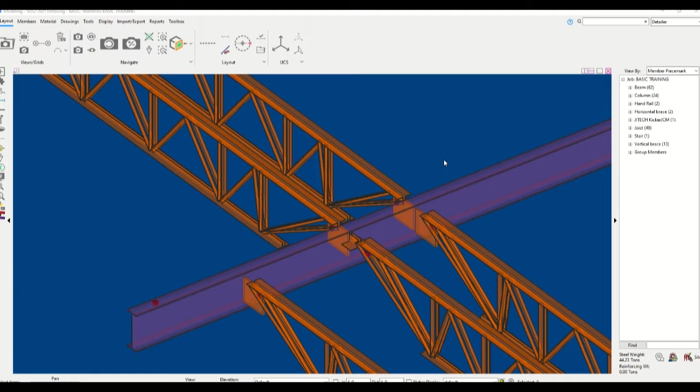So in order to use this, there are a couple of things that we need to know. First, one of them is going to be the field that we call ref X on the end of our desired joist. So in this case, ref X is 1, right?

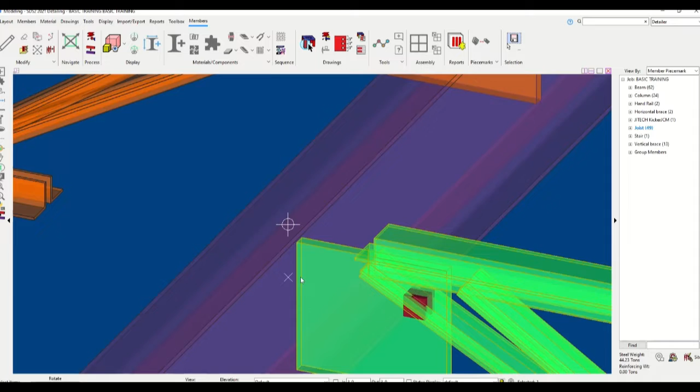And then the other thing you're going to want to know is the height at which you want to place the clip angle, not from the web of the beam or the top of the steel, but from the edge of the plate. Okay? In this case, we're just going to make it 1 inch as well.

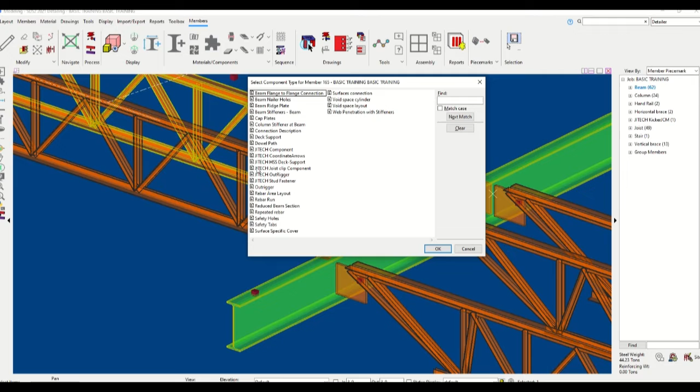So in order to use your component, we go all the way up here to select component type. Oh, you got to select the beam. So the component is actually going to get applied to the beam, even though it's something that affects the joist as well. Here we go. Select this. Okay. So once you've selected it, you click JITECH Joist Clip Component, and you click OK.

It's going to pull up a UI looking like this. So from here, you can control the supported and supporting side of the clip separately. You can control the hole, the bolts, the rows and columns, and the vertical spacing and such. If you have trouble imagining what these stand for, you can just click on the diagram and it'll show you everything step by step. Okay.

You can control the section size. You can control where the long leg goes, or which member the long leg faces. This is the ref X that you have to have filled out. It will not automatically fill it out for you. It might in a future version, but as of right now, there's just not an option.

Then you have to select the top of knife plate to top of angle dimension, and then you place the length of your angle, and you can pick whether it's on the far side or the near side of the joist. Okay, then you can choose to automatically detect joists, and it will find all the joists that intersect with the web of the beam that have a knife plate and add the material to it.

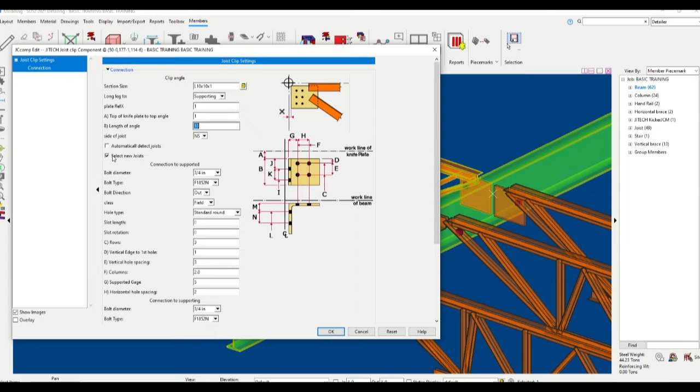For the sake of demonstration, we're just going to click Select New Joists. Okay. And we're going to pick the joist that we want. So we're going to pick this one, and we're going to pick both of these. Okay.

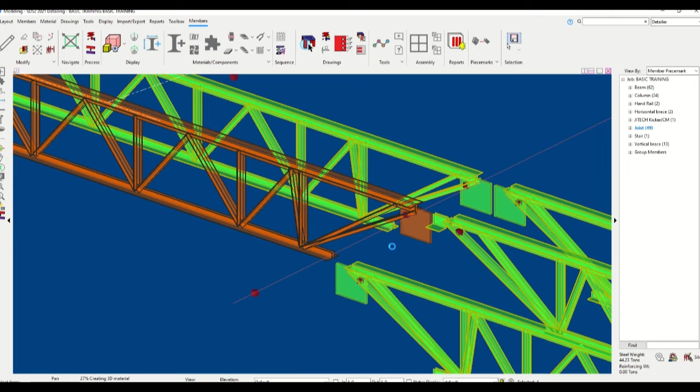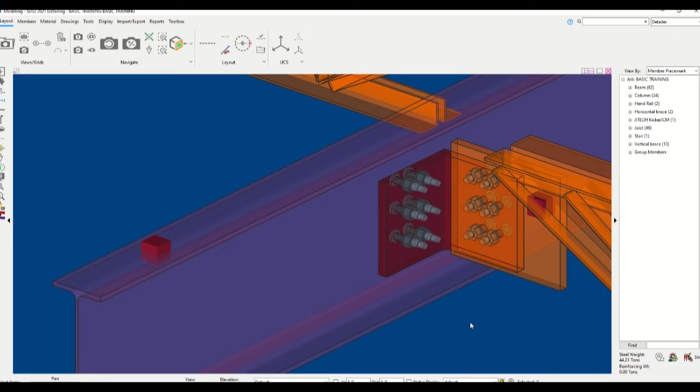Okay. So the reason we actually picked this one, even though it doesn't have a knife plate, is to show you that it won't crash if you pick up the wrong joist. It just won't add anything to it. It won't recognize it as a joist. If you were to change it to a plate and then process this member, then it would add the material to it. Okay. So as you can see, here's your material.

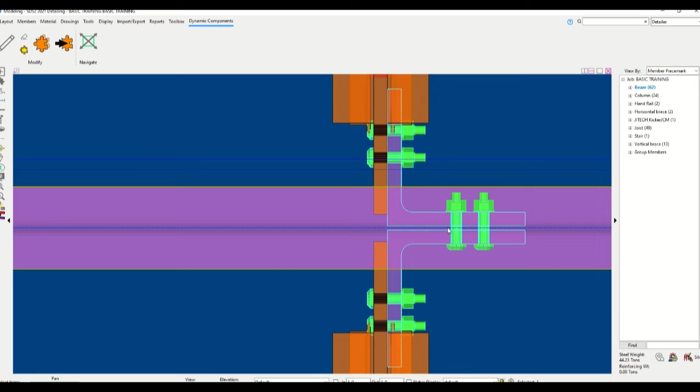Just place your angles. If you want to change it to near side or far side, you can do that, right? And an important thing to notice is that on the materials where the ends are exactly the same, it has actually done a double shear across the web and both clips. But it's very, very important that for these two joists to be recognized as together, they have to be at the exact same endpoint here on the web of the beam.

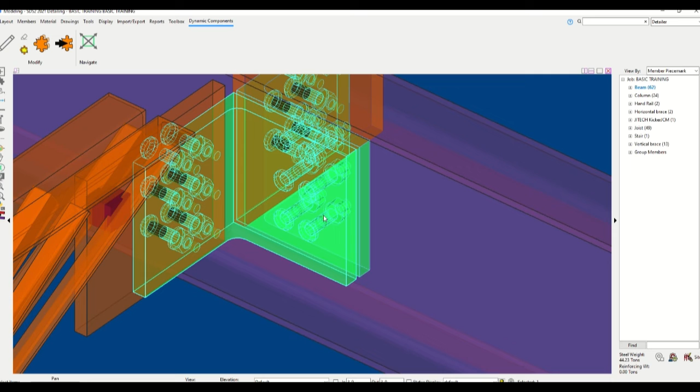Okay, other than that, you can control the bolts, the rows, the size, and all that jazz. You can add slots. If you add slots, the slots will show up on the clip of the material, and it will match circular round holes to the joist. And I believe the same thing happens on the supporting clip. Okay.

So this is a component, meaning that the component can only see what the beam sees. Chances are that if it's not recognizing your joist, it's just that the joist location is a little bit off. If it's not exactly on the center or not interfering with the web, it might not recognize it. So do plan your work accordingly. And then please remember, plugins are there to make the user's life easier, but it's still the user's responsibility to review the results for accuracy.